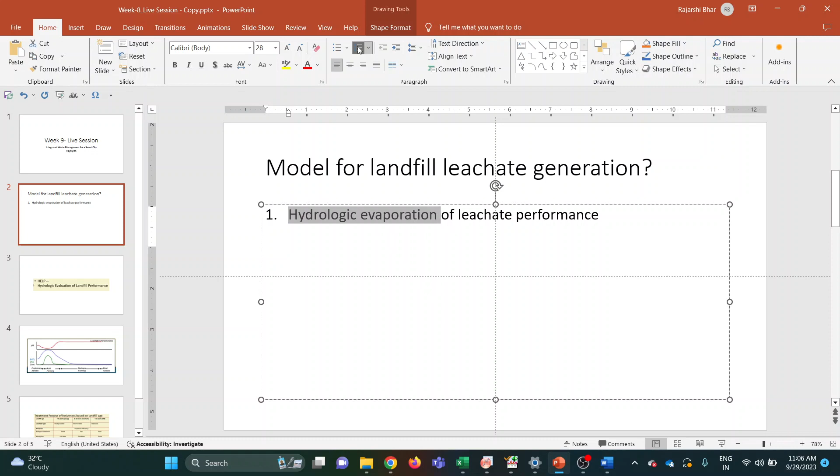So the first question is about which model is used for estimating the landfill leachate generation. Model for landfill leachate generation. And your options will be... So among these four, which one can be the correct answer? You can also unmute yourself or use the chat box, whichever suits you for sharing the answer. The model which is used for estimating the landfill leachate generation.

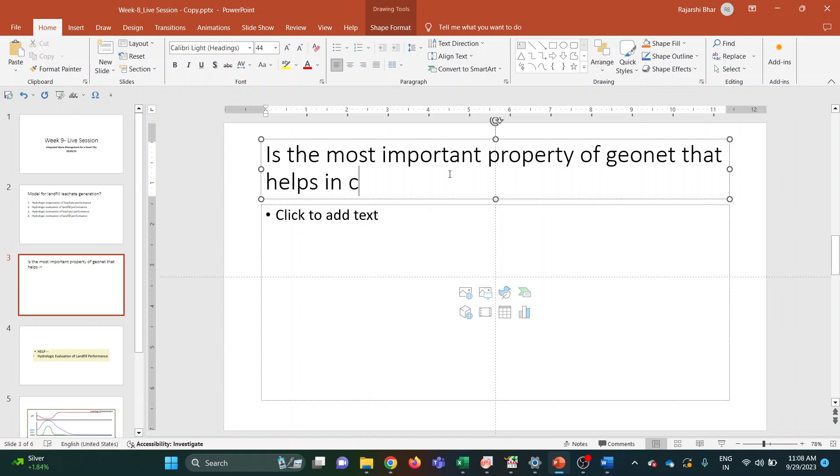Okay, so the correct answer for this particular question is option two, that is the hydrologic evaluation of landfill performance. It is also often abbreviated as HELP model. Now moving on to the next question. Which of the following is the most important property of geonet that helps in collection of leachate during waste degradation in landfills? And your options are...

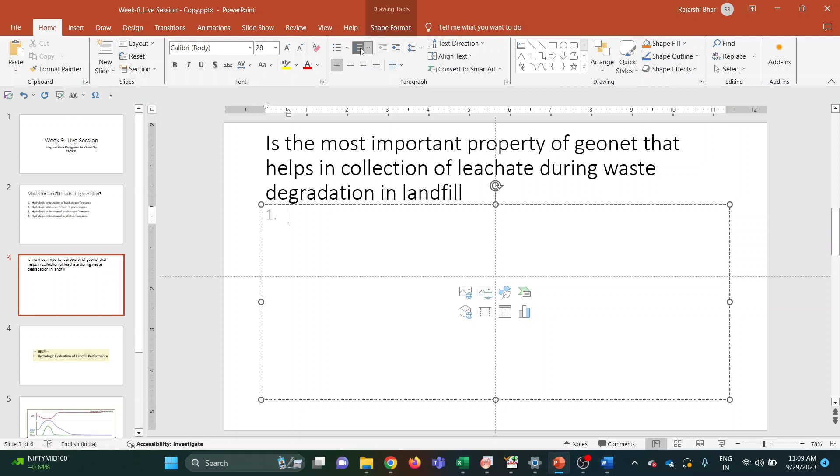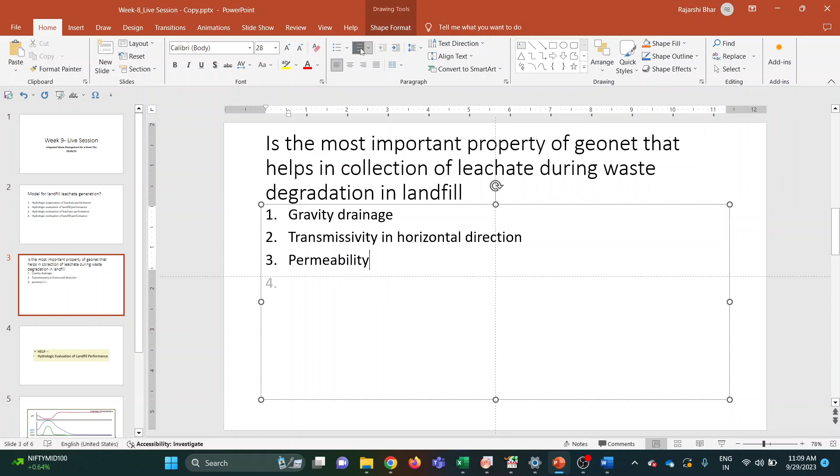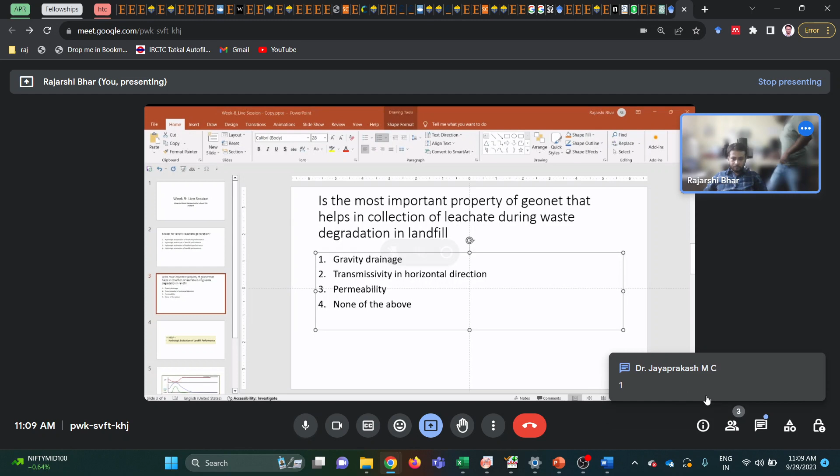Okay. You can have about 2-3 minutes, and then the answer will be shared. Okay, so gravity drainage, yes, gravity drainage occurs normally with the leachate. In this question, once the leachate reaches the bottom of the landfill, that is the liner, which also has geonet as one of its components, the geonet starts playing its role. The leachate seeping into the geonet, instead of percolating downwards, spreads in the horizontal and lateral direction. So that is why option 2 will be the correct option here.

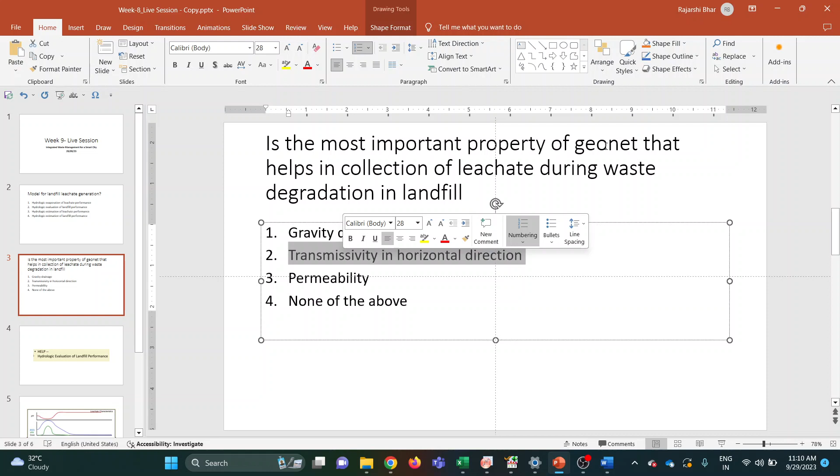That is one of the roles of geonet, how it is designed, and it can also be used for detecting any kind of leak present in the landfill liner. So the transmissivity in horizontal direction is the right option if the question is specific to the role of geonet. On the other hand, if the question is only related to landfill leachate, then gravity drainage is one of the factors how the leachate comes to the bottom. While permeability can be the one due to which it may seep through the liner, the leachate collection layers and other geomembranes, and might reach the ground level if there is some problem with it.

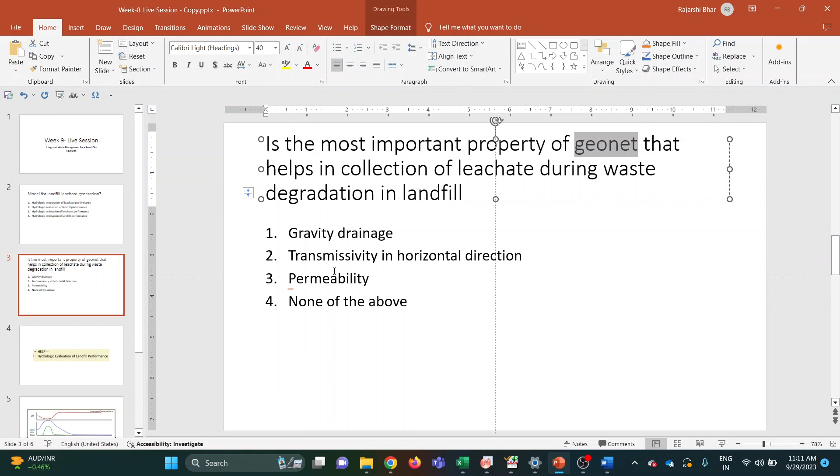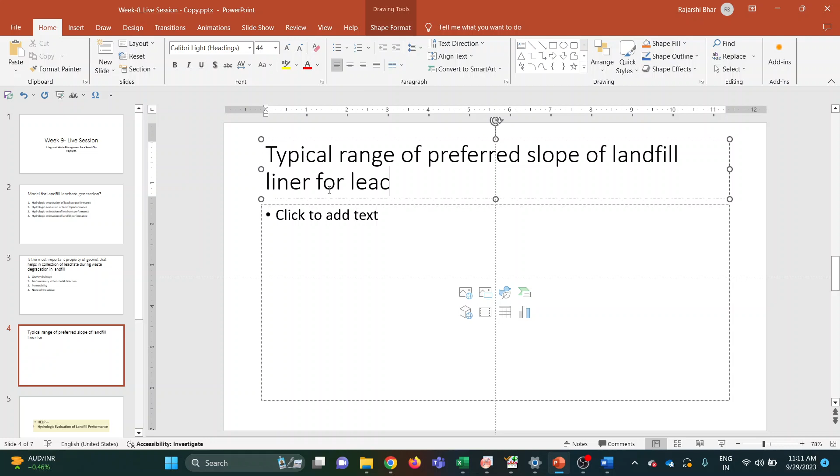So moving on to the next question. It is related to the slope of the liner. What is the typical range of preferred slope of landfill liner for leachate collection? What should be the preferable slope? And your options, all in percentages, are: 0.5 to 1, 20 to 35, 10 to 15, and 2 to 8.

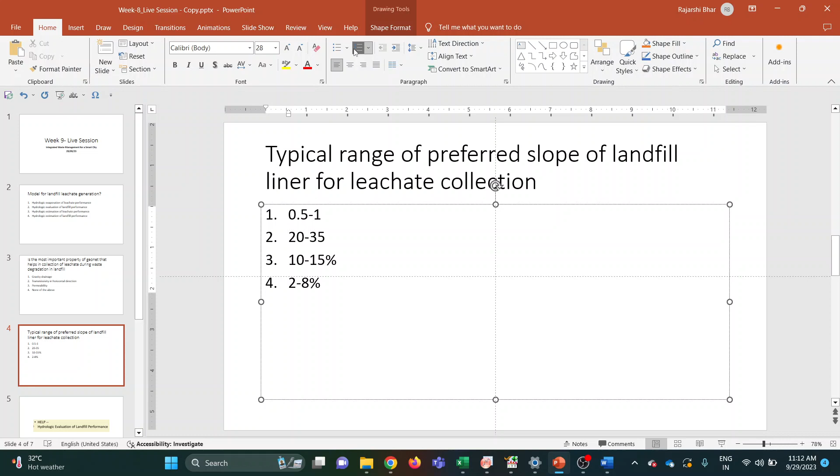Yes, option 4 is the correct answer for this particular question. Now we will move on to the next one quickly.

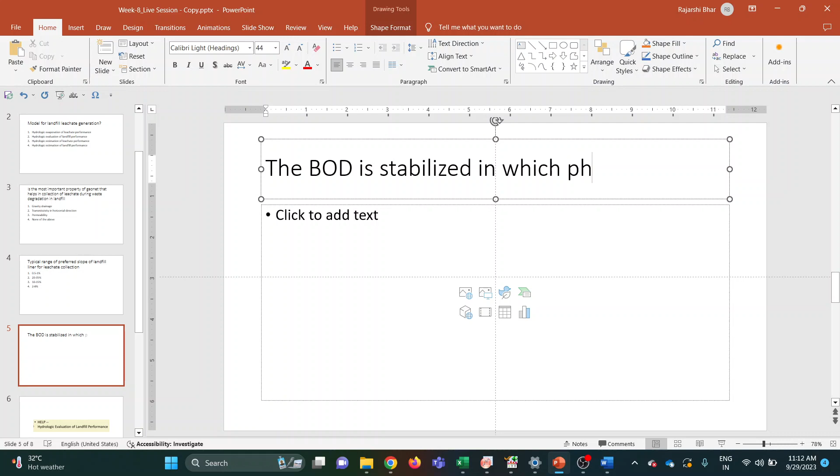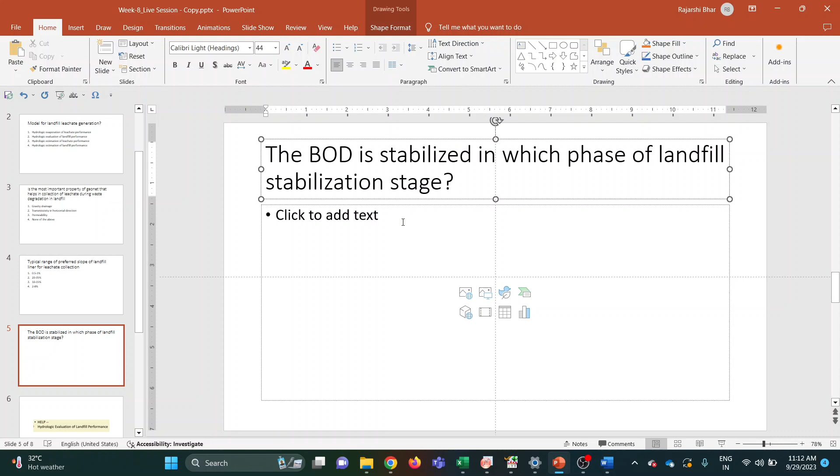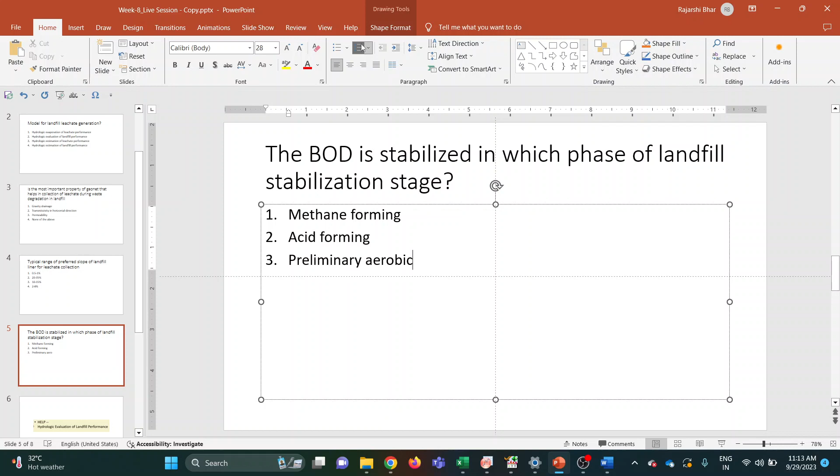So the BOD is stabilized in which phase of landfill stabilization stage? We know that the landfill has got various phases or stages during its life. So among which of those phases is the BOD stabilized? Your options will be methane forming phase or stage, acid forming. So these are the options. When does the BOD get stabilized in landfill during the four of its phases?

I believe that questions like these, which are quite conceptual and in fact easy to deduce, can be a part of the examination during the final stage of this course.

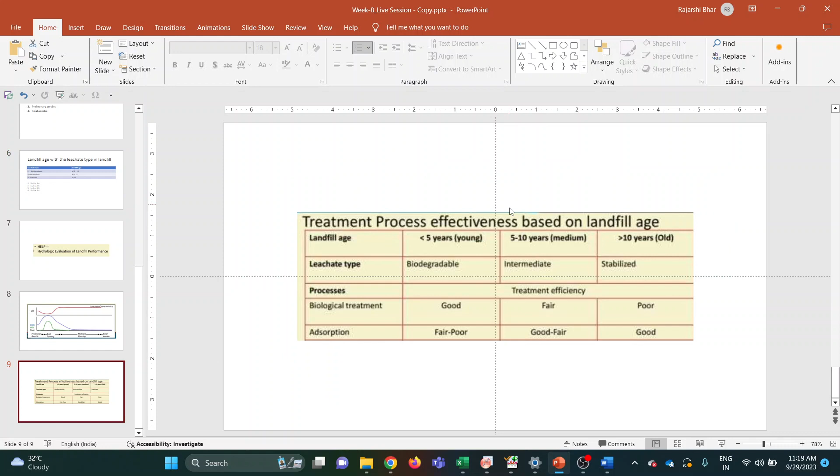I hope you can see it. So you can see that based on the leachate type, the landfill age, these are the matching options which were shared in the question.

If you look at the treatment efficiency, both biological and adsorption based, since initially the nature is biodegradable, biological treatment will have the best efficiency if I consider these three stages. After that, in the intermediate stage, it falls a bit, and it's very poor when the landfill has become old and stabilized, because most of the biological matter present there has already been utilized. The substrates have already been utilized by the microbes, and the rest of the material or mass dissolved in the leachate can't be used efficiently by the active microbes which usually participate in biological treatment.

On the other hand, if we are talking about adsorption, initially it can be fair to poor, then it follows an opposite trend. The reason being there can be various dissolved ions present in the leachate because it passed through different kinds of materials.

Various types of salts and metals can be present, because once leaching starts through acidic leachate, some metals can start dissolving into it. In the beginning, when you use an adsorbent in the leachate, it primarily functions based on having a good surface area, along with a few other parameters. But when using an adsorbent in a complex, heterogeneous mix of leachate with n number of dissolved things and possibly suspended material, the surface where the contaminant was supposed to stick instead gets interfered with by something else, like dissolved organic matter. It starts interfering with the adsorbent, forming a layer around it or blocking pores based on particle or molecule size, which can seriously hinder the efficiency of the adsorption process.

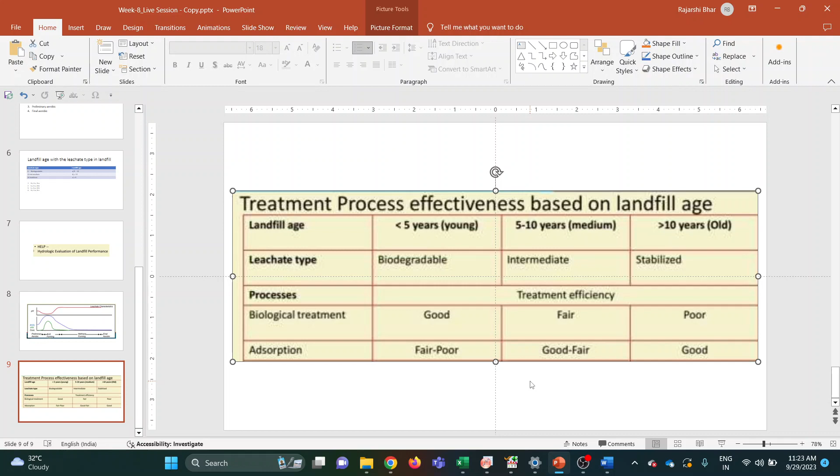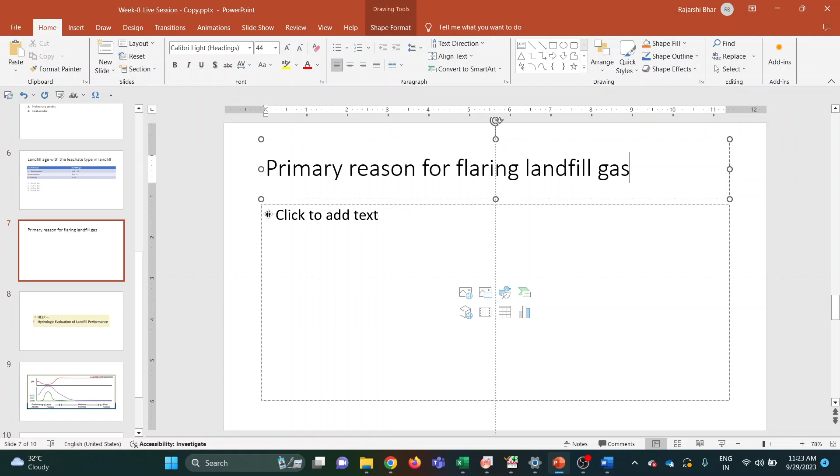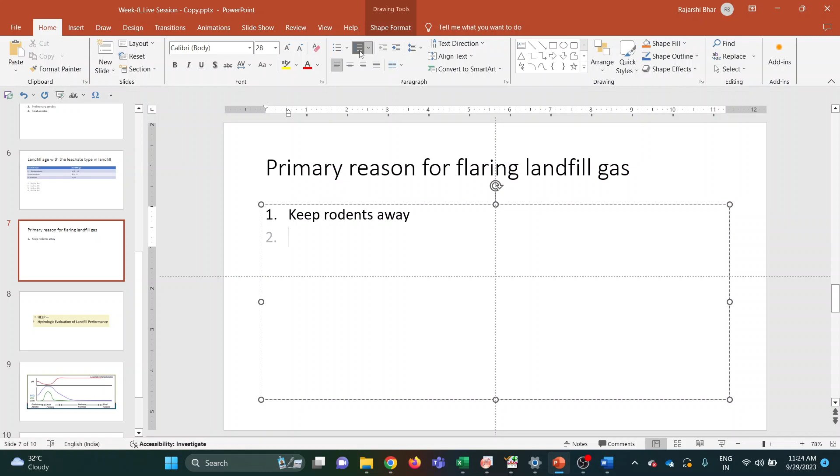Now we will move on to the next question. Which of the following is the primary reason that we flare the gases produced in the landfill? The options include keeping rodents away, among others. So which one do you think is the correct answer? This is a very simple and basic question: why do we flare the landfill gas? What is the primary reason?

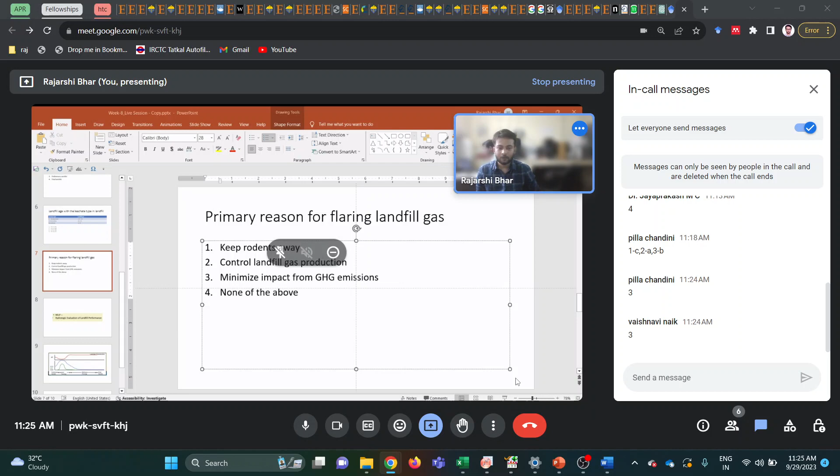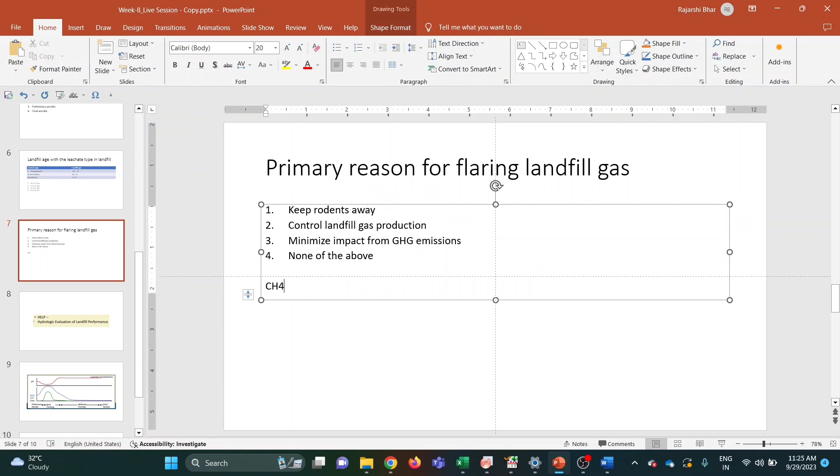Option 3 is the correct answer: basically, to minimize the impact from GHG emissions. We know that in a landfill, most of the time it is in an anaerobic state, so methane is the main product. Methane has about 25 times higher global warming potential compared to carbon dioxide, so if one molecule of CH4 is emitted, it has 25 times higher impact. That is why we flare the methane. When flaring, we are basically combusting it. So CH4 gets converted to CO2 plus H2O. Since methane was 25 times more potent than CO2, when we flare it, the same carbon with four hydrogens gets converted to CO2, reducing the impact compared to if methane had been released directly to the atmosphere. That is why we flare the gas.

I hope this was clear for everyone. Now we will move on to the next question, which is question number 7.

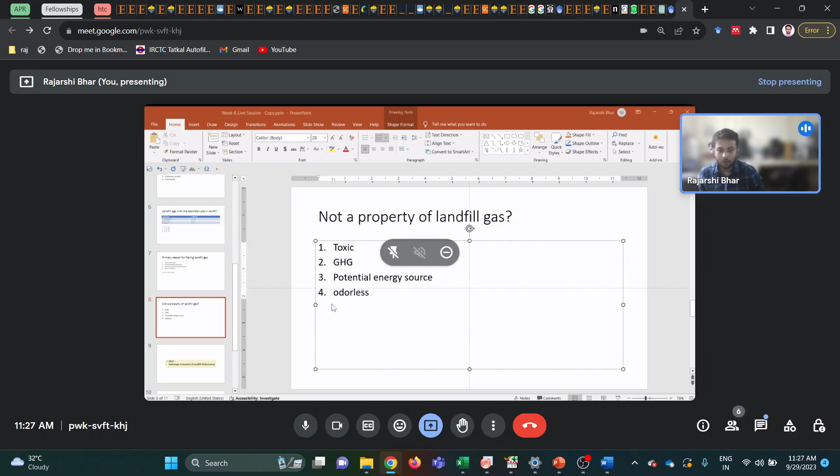The question is: which of the following is not a property of landfill gas? Again, a simple question. Option 4 is the correct answer, because landfill gas can be, and often is, having a very foul odor. So option 4 is not a correct property to exclude — landfill gas does have a very foul odor. That was the correct answer.

Now question number 8 is a numerical based question, and you have to calculate the landfill's capacity. SW is solid waste, generated at the rate of 15 tons per day.

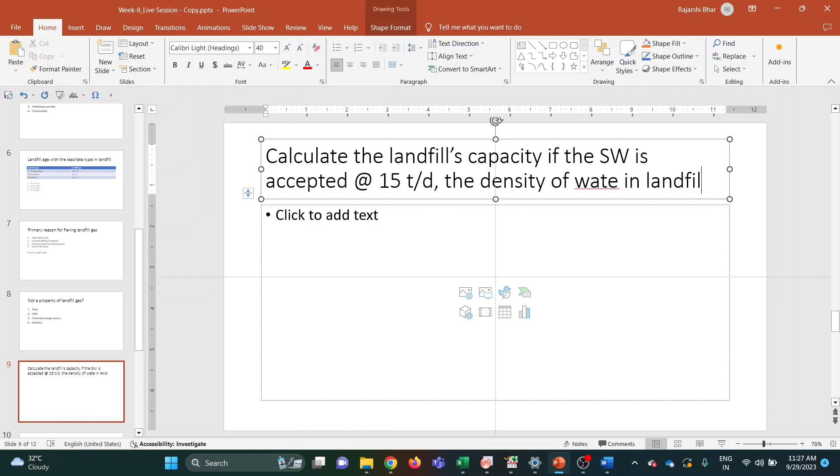So the landfill volume is, how much? 3 lakh meter cube, let's see whether it is 3 lakh or not. Add a few more zeros. Yeah, so the landfill volume is 3 lakh cubic meters, and the density of waste that will be put into the landfill will be 365 kg per meter cube, with a solid waste acceptance rate in the landfill being 15 tons per day. So your question is, what is the capacity of the landfill with the data shared with you? You can have about 5 to 10 minutes to think about this question and solve it, and then I will share the answer and solution.

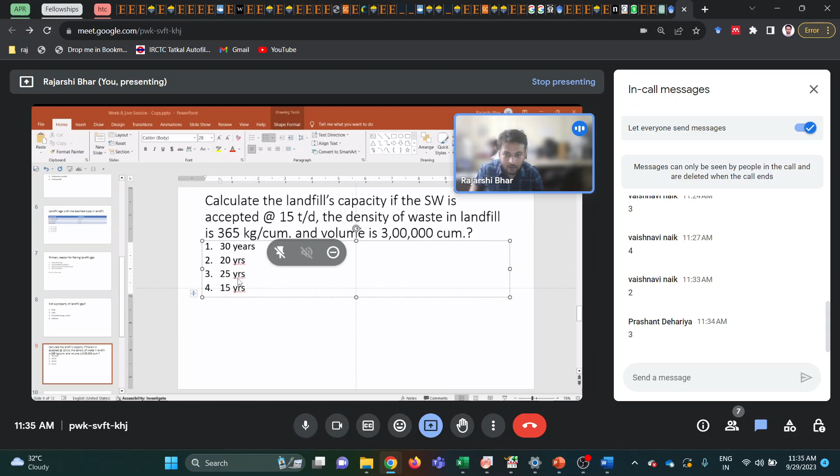Okay, so option 3 is 25 years, and option 2 is 20 years. Okay, so we will see what we are getting. My question is to calculate the capacity of the landfill.

So first things first, I have to see how much waste my landfill can hold. So my landfill's volume is going to be 3 lakh meter cube, and the density of the waste we are going to dump in there is going to be 365 kg per meter cube. So it's very easy to calculate the total mass of waste that our landfill is going to accommodate.

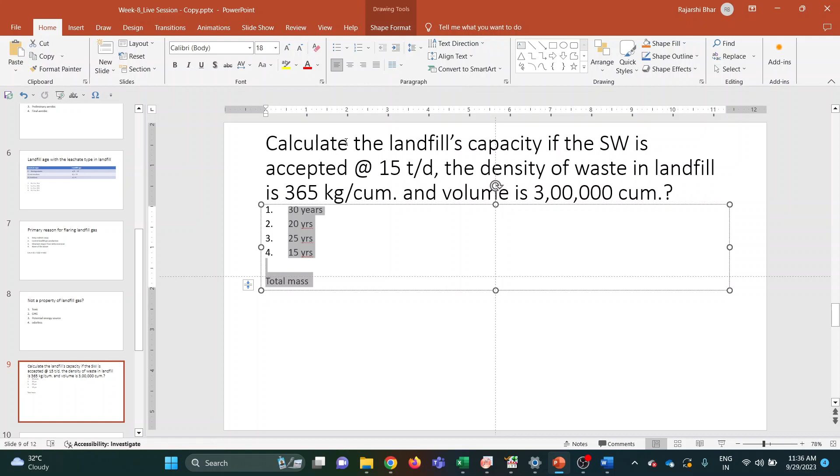So let's see, total mass of waste in landfill is going to be 3 lakh into 365. I will use the calculator to see what it is, otherwise we will leave it like that and the value will come out in kgs. Then I need to find the landfill capacity, and what we have been told is that the landfill is receiving 15 tons of waste per day.

So now it's very easy, we are just going to divide them. So landfill capacity - this much kgs is what it can hold, and if it is receiving 15 tons per day, divide the total mass of waste in landfill by 15. Since it is given in tons, I have to multiply it by 1000, and the answer I get will be in days. So I will quickly calculate and see.

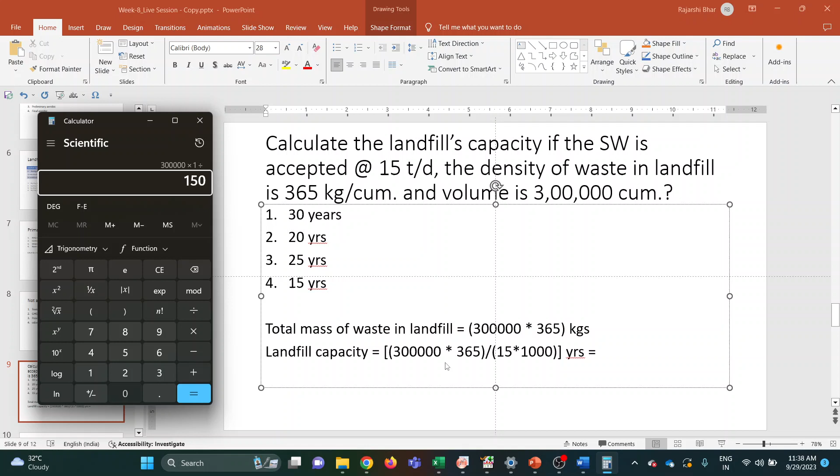Okay, and then if I have to convert it into years, again I have to divide this entire value by 365 itself. So the correct answer is 20 years, that is option 2. I hope that was clear. In case you have any doubt at any point, please feel free to unmute yourselves and share that with us, or you can also use the chat box.

If it's all right, we will move to question number 9 then. Here you have been asked which of the following methods should not be opted in the absence of an effluent treatment plant, that is ETP, at a landfill site. And your options will be...

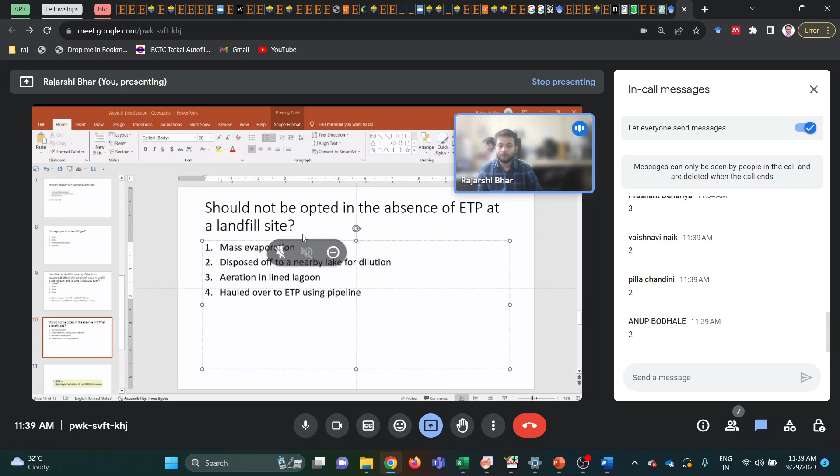Among these options, which one do you think this question is pointing towards? Okay, so option 2 is the correct answer, as you all have rightly mentioned. And I hope you also know the obvious reasoning behind it as well - disposing such toxic waste, having high BOD and COD loading and various other dissolved metals and other organics, into any water body will be a serious issue there.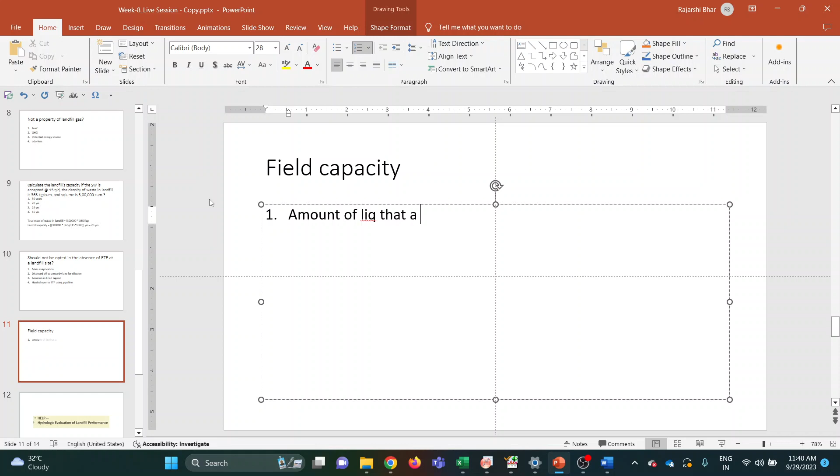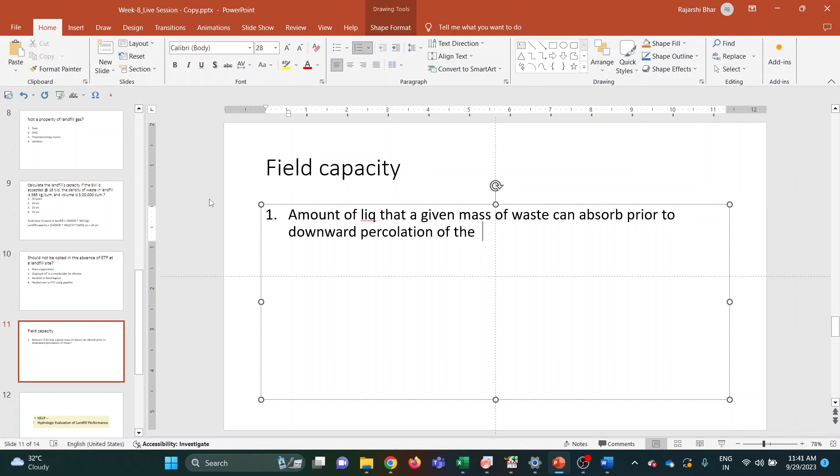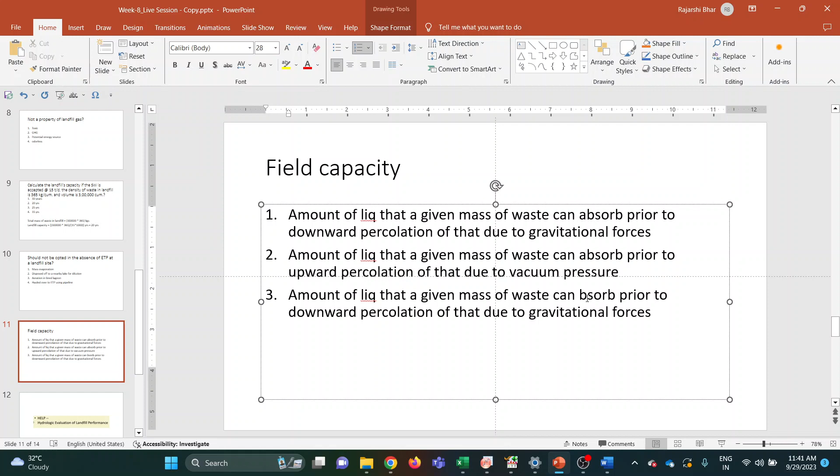Now moving to question number 10. So here I have to type a bit more. So you have been asked, what is the field capacity? Fine, options are... Yeah, so what is field capacity? And these are your options, like is liquid...

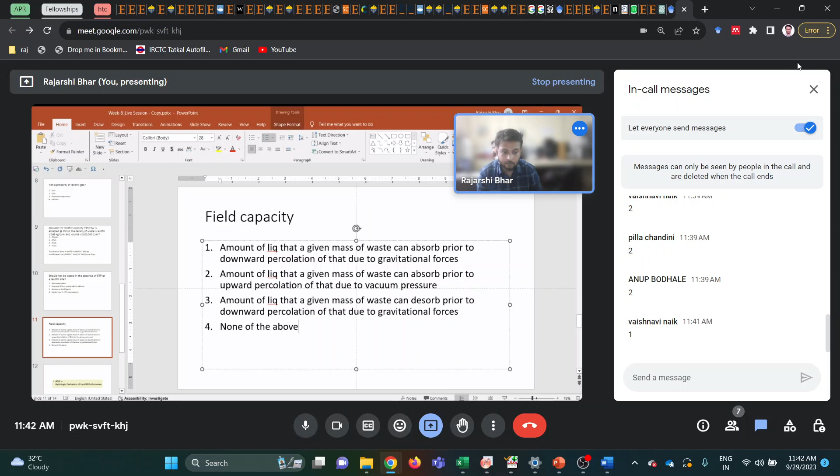Yes, option 1 is the correct answer. Field capacity is the amount of liquid that a mass can hold prior to its downward percolation due to gravitational forces, because that mass has various pores, and before the liquid actually starts seeping downwards, all the pores need to be first occupied with water. Once 100% of the pores are filled with water, we say that field capacity has been reached, and whatever excess water we add thereafter gets percolated below due to gravitational forces.

Now moving to the next question. In the design of a landfill system, what is the purpose of a cap system? What is this? And the options will be...

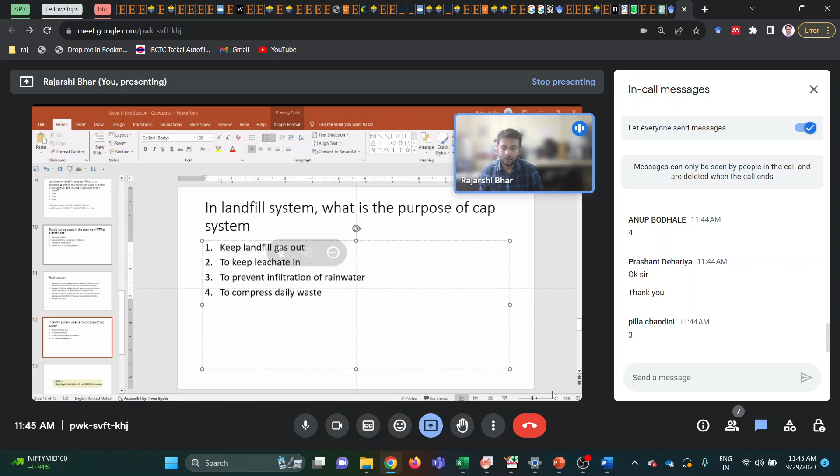Okay, welcome. So in this particular question, what is the purpose of the landfill cap? So I can see that option 4 has been chosen by most, then option 3 is another. Fine. So the basic reason why we keep a cap is that it is to prevent the infiltration of rainwater.

So first, there is a liner, whose main role is to prevent the seepage of the leachate further down into the soil and maybe reaching groundwater. We need to prevent that, so that is why we layer the liner. It is also to keep the leachate inside the landfill system so that it can be pumped out from the lowest points of the landfill and then treated thereafter.

But what the cap does is that once you have filled in all your waste, it has already been compacted, but the role of the cap is not to compact it. That is done in other ways. The role of the cap is mainly to keep the rainwater that is falling on the landfill from seeping into the landfill so that leachate generation can be minimized. That is one thing. Landfill gas out is not the correct answer, because another role it plays is to keep the landfill gas in. So that can also be another role of the cap. So in this particular question, the correct option is to prevent the infiltration of rainwater.

So now we will move to question number 12, and it talks about the role of geonet in the landfill liner system. We have already discussed it in one of the starting questions today, so I think you can quickly think of the answer.

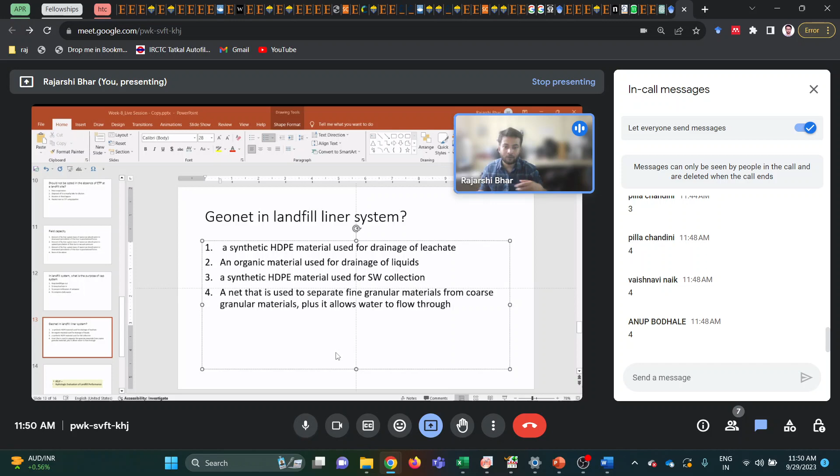Now the next, how many questions is that? 13, 14, 15. So the next three questions, they can have multiple correct answers. So just a disclaimer, you might need to think a bit more about them.

So the first one is question number 13. What are the different leachate removal techniques from landfill? So these are the options, and just a note that there can be more than one correct answer.

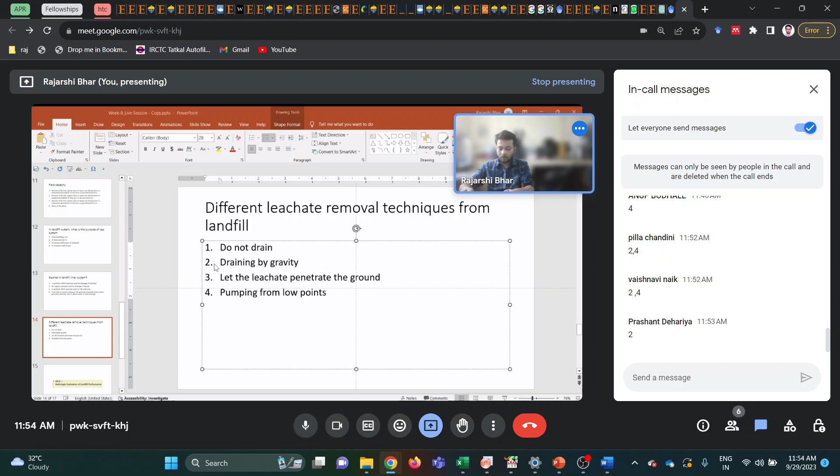So then we will move on to the next question. You have to think about the different methods for gas extraction from landfill.

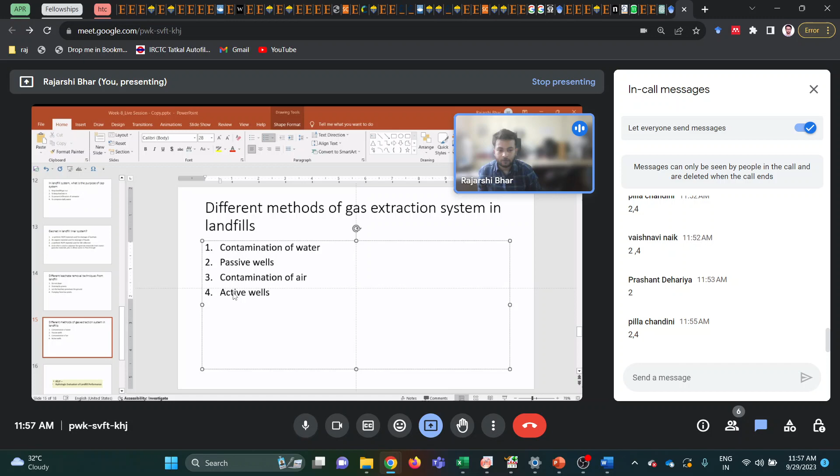So this was the 14th question. Now we have the last one with us. The question asks which of the following are the different anaerobic leachate treatment methods - aerobic leachate treatment methods. So your options will be - this is also a very simple question.

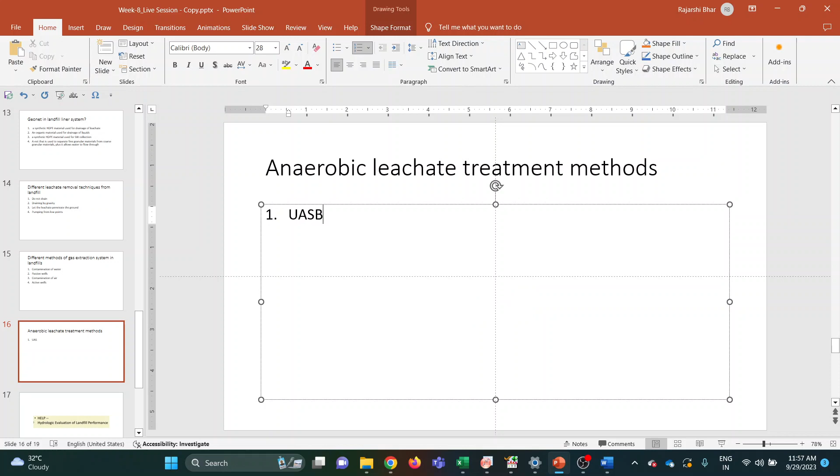UASB reactor. Okay, so the full form of UASB is upflow anaerobic sludge blanket reactor. So which of these are used for anaerobic landfill leachate treatment.

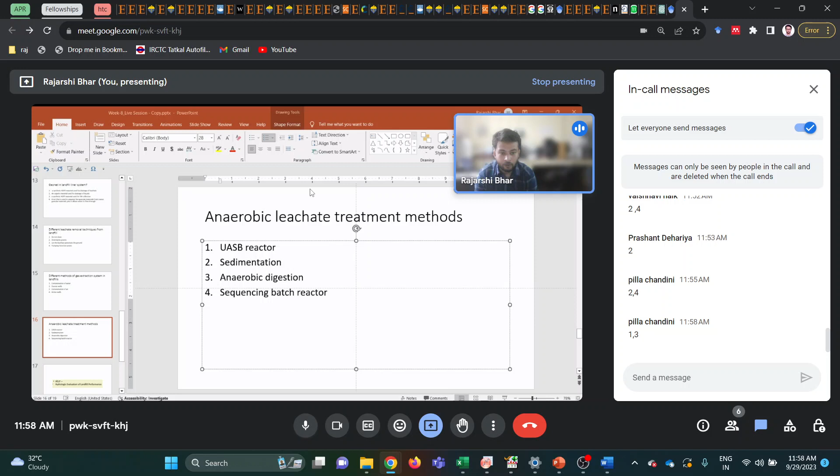Option 1 and option 3, yes, absolutely correct - it was quite obvious as well. So anaerobic digestion, you all must already have an idea. So a brief about the upflow anaerobic sludge blanket reactor - if you look at the name itself, it says that there is an upflow, so the influent is coming from the bottom of it. So just a crude diagram I will show you - a very crude one. Let's say somewhere from the bottom there is an inlet.

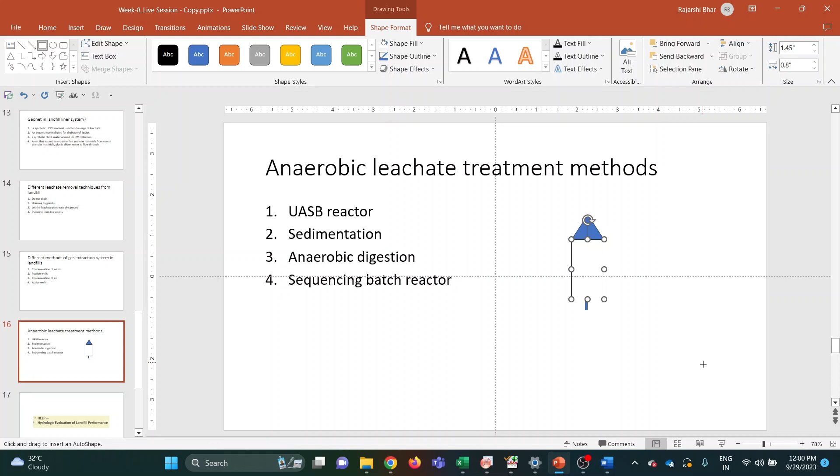And then sludge blanket reactor. Why are we calling it a sludge blanket? So what happens is that when the wastewater starts coming from the bottom and moves upwards, it starts forming a sludge. So that sludge forms a layer somewhere here in between. It forms a layer. And why is it floating?

Because during the anaerobic digestion process there are gases released, and those gases keep on getting stuck or absorbed on the sludge surface, giving it a kind of buoyant effect, so it doesn't fall down. That is why it floats somewhere in between, and it helps in further degradation of the wastewater that is coming in,

because when it forms a blanket in between, if you have your wastewater with some particles or other particulate organic materials, solid materials in there, they can't just go through it and reach the top, because at the top there is an outlet. Let's say the outlet is somewhere here, so it won't happen that they just bypass the entire thing and move out along with the effluent.

So the solids get trapped in this sludge blanket, and after the treatment occurs, some of the solids present in the sludge blanket fall to the bottom, from where they are removed at regular intervals. And that is why the solids usually don't pass through this blanket and come out in the effluent. That is one of the roles of the sludge blanket.

And then we have a dome at the top. The gases which are formed are collected in these domes, and sometimes there are a few solids bypassing the sludge blanket, because nothing has 100% efficiency, so we have also got some separators here which can be somewhat inverted triangle shaped.

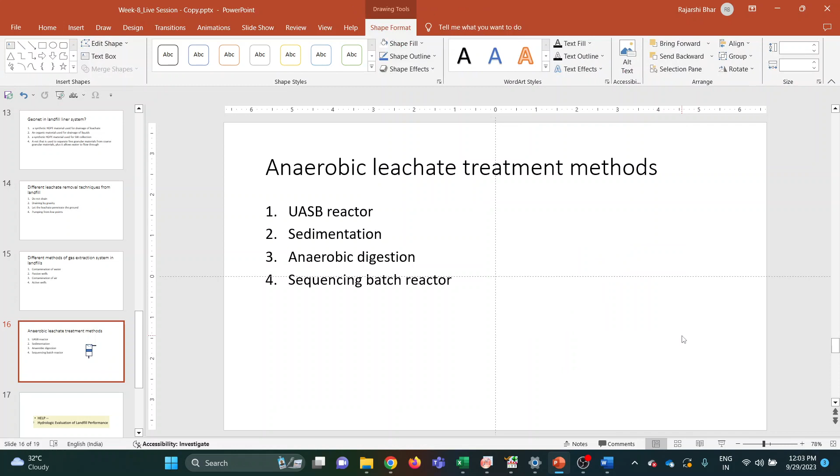These are the 15 questions that we had with us today. I will quickly go through all the questions again for those who joined us a few minutes late.

So in today's live session, the first question asked us to find the model which is used to determine the amount of leachate generated in a landfill. The correct option was hydrologic evaluation of landfill performance. That is one model used to determine the quantity of leachate that can be generated, and it is often abbreviated as the HELP model. So that was the first question.

Then the second is, which is the most important property of a geonet that helps in the collection of leachate during waste degradation in landfills? We also got a similar question at the end. That is why I was saying that these are similar questions.

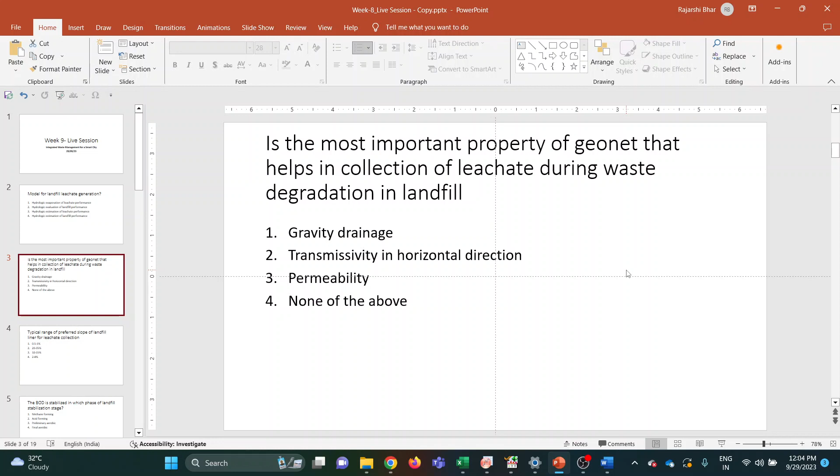So one of the major properties of the geonet is that it allows transmissivity in the horizontal direction. That is what often helps us to detect any kind of leakage that is present in the landfill liner system.

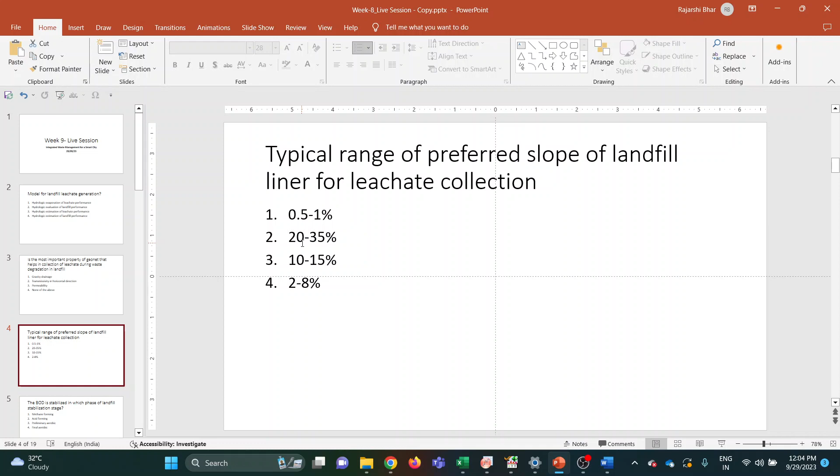Then the next was, what is the typical slope of a landfill liner which is preferred? The correct option was 2 to 8%, because 20 and 10 to 15 are much steeper slopes, and if such slopes are used, there will be added cost for digging, excavation, and in fact pumping costs of the leachate can also increase. So that is why 2 to 8% is the usual slope.

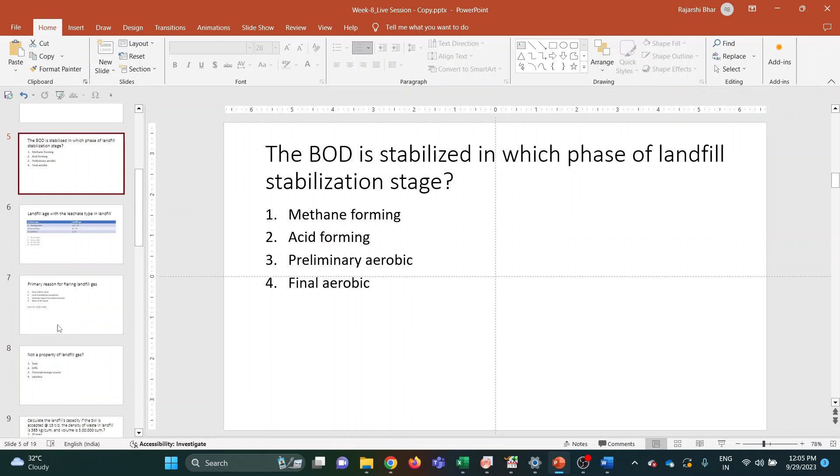Yeah. So the next question is, the BOD is stabilized in which phase of the landfill? Whether it is in the methane forming phase, acid, preliminary aerobic, or final aerobic. In order to answer this question, we took the aid of a diagram here.

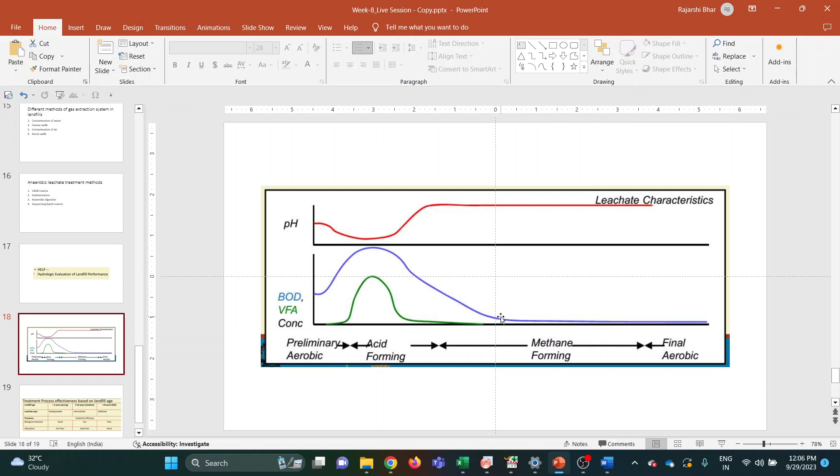But after acetogenesis there is methanogenesis, that is the methane forming phase, and in that the carbon in the organics present in the leachate starts getting transformed to methane and carbon dioxide. So that is why the biochemical oxygen demand starts falling there, and somewhere in the methane forming stage, it becomes stable.

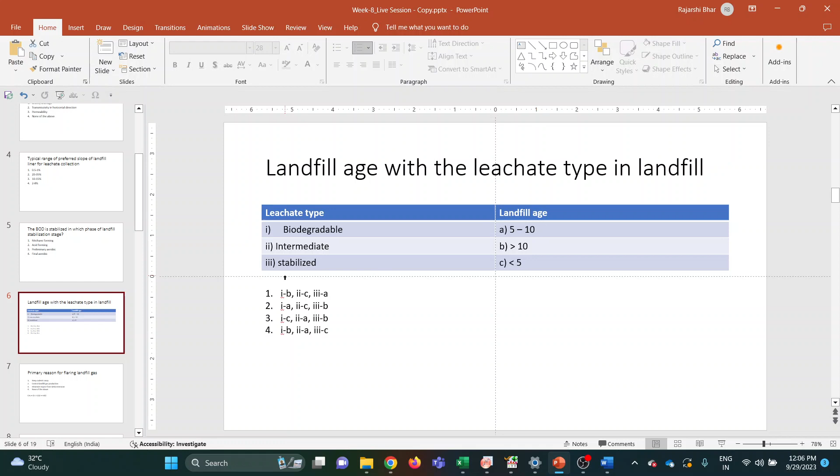So that was it. The next question was a match the following type, which wants us to relate the landfill age with the stage of the landfill. If the landfill is in the biodegradable phase, the age is less than 5 years. After the biodegradable phase, when most of it is already degraded, it reaches an intermediate phase, which is 5 to 10 years, and then the stabilized phase, which is more than 10 years. So this was the correct matchup.

Then the question was the primary reason for flaring landfill gases. Here the primary reason was to minimize the impact of greenhouse gas emissions. Why? Because methane is the primary gas produced from landfills, and it is almost 25 times more potent in global warming potential than carbon dioxide. That is why we flare it, or combust it. Then it gets converted to CO2, which is much less potent in terms of global warming potential than methane.

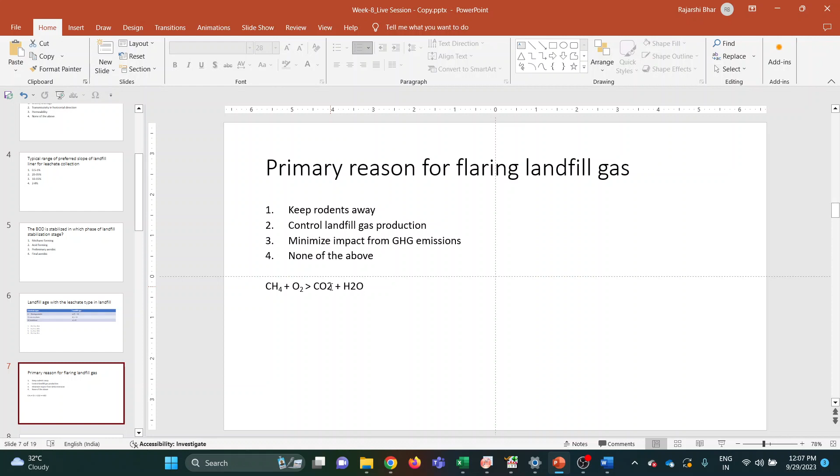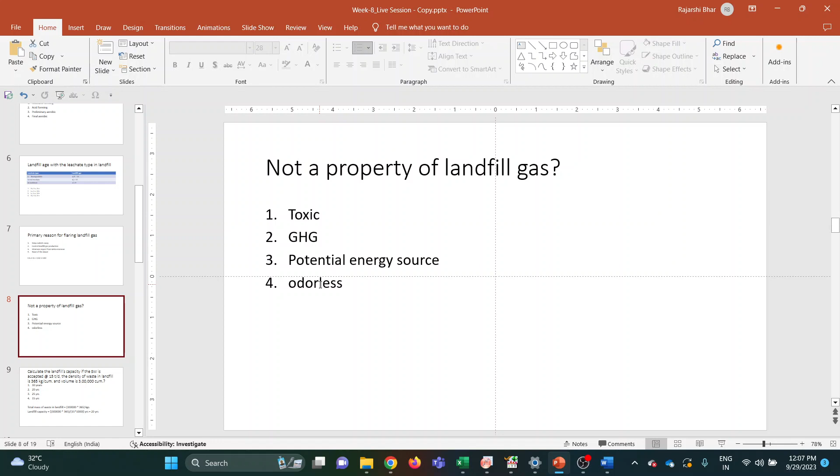After that, we have the question asking which of these four is not a property of landfill gas. The correct answer is odorless, because instead of being odorless, landfill gas has a very foul odor.

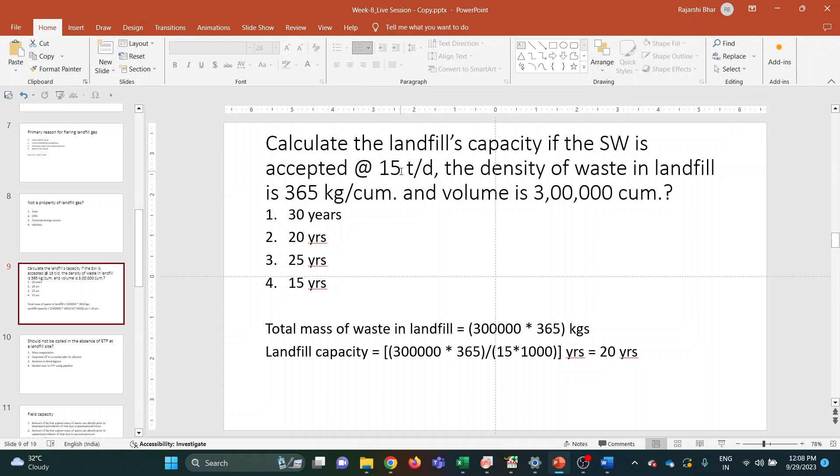The next question was a numerical one, very simple. You have been asked to find the landfill's capacity, and you have been provided with how much solid waste the landfill receives each day, the density of the waste in the landfill, and the total volume of waste that can be accommodated there. Multiply the volume by the density, and you get the total mass of waste the landfill can hold. Then, to determine the number of years it can keep receiving waste, simply divide it by the waste acceptance rate, 15 tons per day, and you get the answer, 20 years.

After that, we had a question asking what should not be done in the absence of an ETP at a landfill site. All of you correctly mentioned that we should not dispose of it to nearby lakes for dilution, because the COD and BOD of landfill leachate are absurdly high compared to normal sewage. Along with that, it also contains various dissolved contaminants which are not typical for sewage, but much more characteristic of landfill leachate.

That can be various dissolved metallic ions, various dissolved minerals can be there, because the leachate is acidic in nature. If you take a look at its phases, you will see that there is acidogenesis and acetogenesis, so these all contain volatile fatty acids. When there is an acidic environment, metals tend to leach from the solid phase to the liquid phase.

This is the usual typical behavior of metals. That is why we see the ionic conductivity or total conductivity of the leachate to be very high, much higher than normal sewage. So it should never be disposed of to any water body with the intention of dilution. It can only be done once it has passed through suitable and appropriate effluent treatment units.

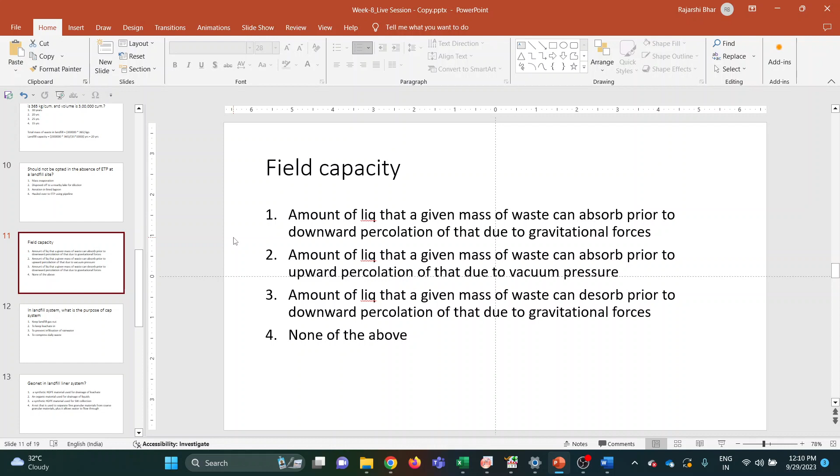The next question was related to the definition of field capacity, and everyone answered correctly. Field capacity is basically the amount of liquid that a given mass of waste, or soil, can hold or absorb prior to the downward percolation of water due to gravitational forces. Any waste or soil has pores. First the water occupies all the pores, and once that is done, the excess water you add flows downwards due to gravity. That total amount of water a mass can hold is called field capacity.

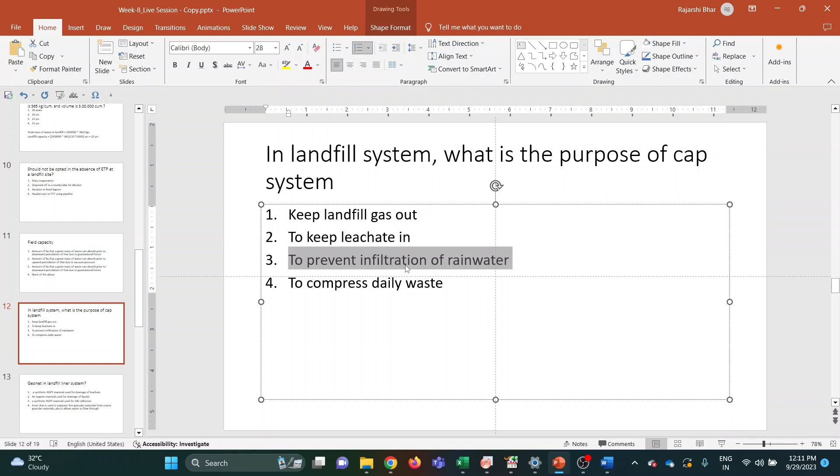The next question was the role of the cap in the landfill liner. Its major role is to keep the landfill gas in and to prevent the infiltration of rainwater. Since the first option said the exact opposite, it was not correct. Instead, option 3 was correct because it talks about preventing rainwater from infiltrating the cap system and coming into the landfill.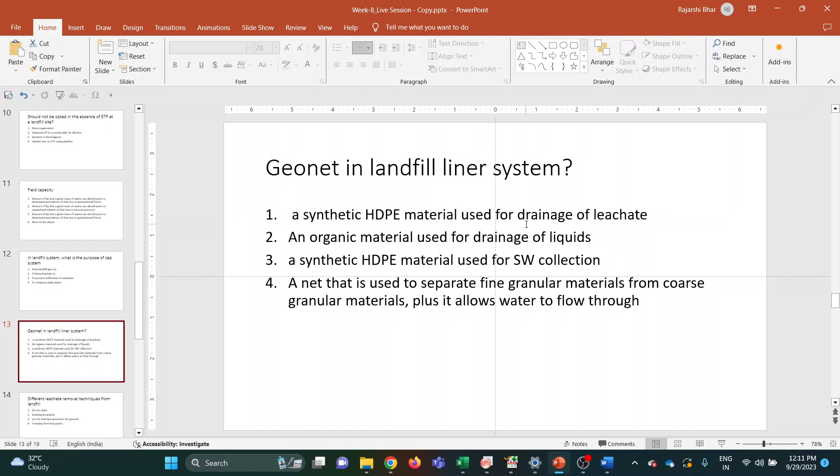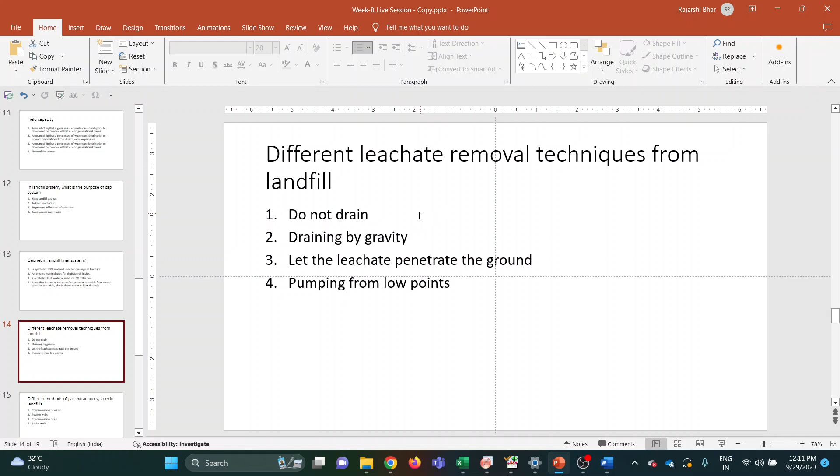Then we had the role of geonet. The correct option was option A, where this material is used for the drainage of leachate. When the leachate comes in contact with the geonet, it flows in the lateral direction, from where it can be removed and detected as well. Then we had the question about leachate removal techniques. This was a multiple choice question, and draining by gravity and pumping from low points were the correct answers.

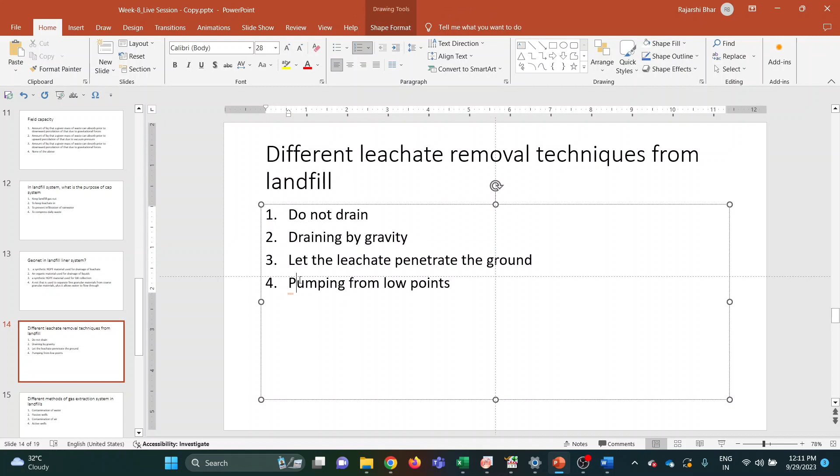The next question was similar, asking about methods for gas extraction systems: passive wells, where one end of the well is inside the landfill and the other is open to the atmosphere, and active wells, where one end is inside the landfill and the other is connected to a pump that sucks the air out, creating a negative pressure gradient and drawing the gas out of the landfill.

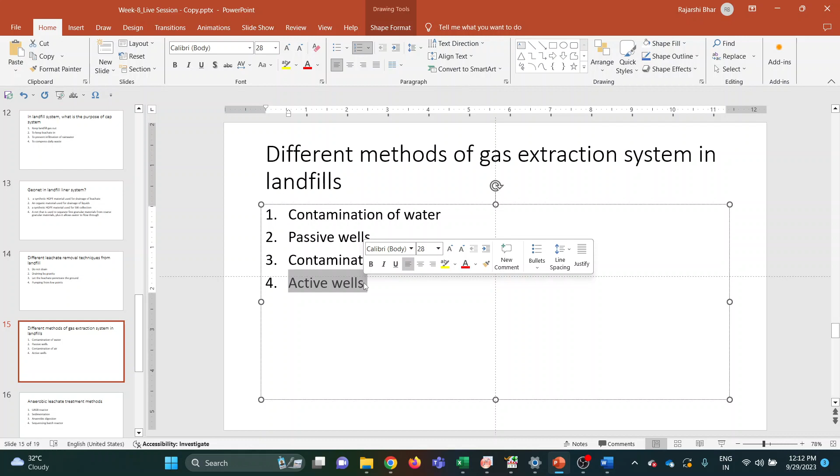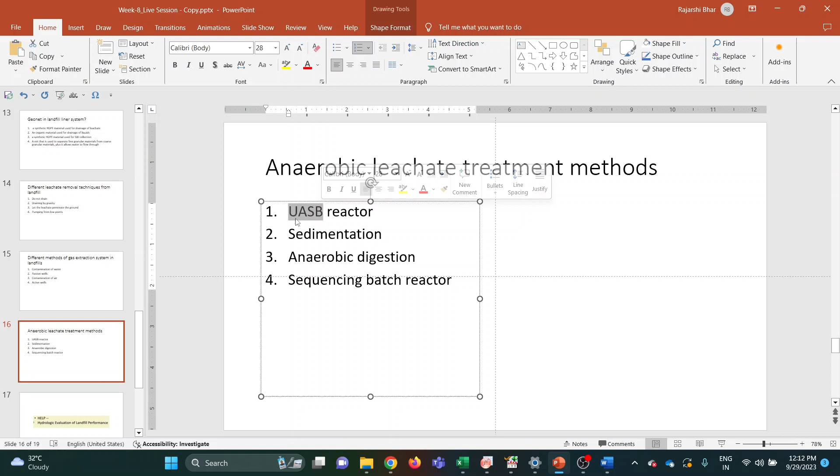After that, we had anaerobic leachate treatment methods. You were asked which of these is anaerobic. If you look at the full form of UASB, upflow anaerobic sludge blanket, the term anaerobic is present in the name of the reactor. And then we have anaerobic digestion. So option 1 and option 3 were the correct answers. These were the questions we had today.